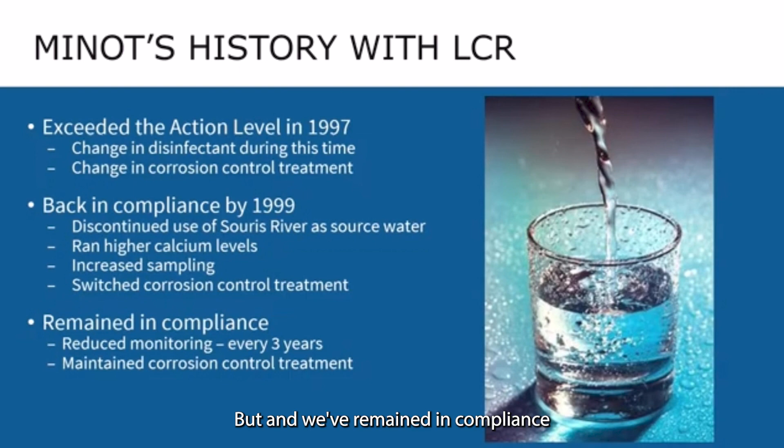And then over the course of those 2 years, we used quite a few different products to varying success. And we landed on one that basically got us in compliance and has held us there. We haven't seen any improvements. Every time we do a sample event, we still have a couple samples that test above the action level, but we haven't seen any improvements in those. So I'll get into that a little bit later. But we've remained in compliance since the late 90s.

So we've been put on reduced monitoring, so we pull samples every 3 years now. And then we've maintained the product that we use. It's a phosphate product. It's called tetrasodium pyrophosphate. It's NSF approved, and it's one of many phosphates that can be used in a drinking water system for corrosion control.

So here's where some of the issues come in. That rule was published in the 90s, so now they're updating the rule. They've started this years ago. We've worked with other communities in the state. We've provided comment to the American Water Works Association, to the League of Cities on some of the issues that we see with the rule.

So they've been contemplating those, but some of the directions that they're heading is basically they want complete and total replacement of all lead service lines in the country within the next 10 years. I think there was about $11.5 billion worth of money in the infrastructure bill that's being used to back up some grants in the state. So it's going to be a pretty big lift at some point.

So one of the first components of that is we need to complete an inventory of all service lines in the city of Minot. There will be some new sampling requirements. They call it the first and fifth liter. So right now, when we do a lead sample in a house, we tell the homeowner to let their water sit overnight for at least 6 hours.

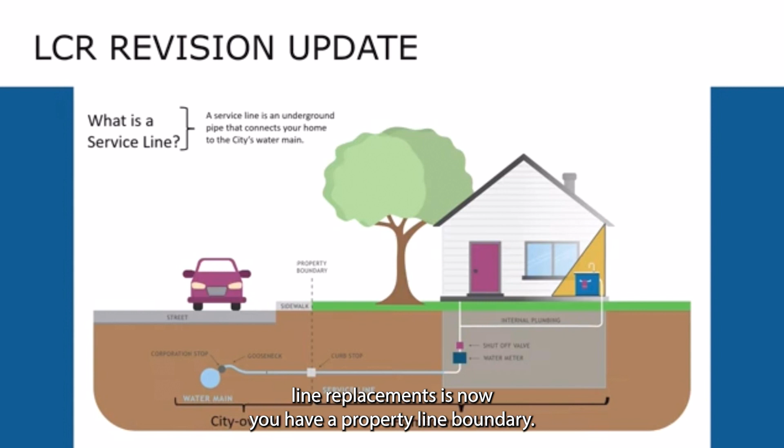The issue that we're going to have when we get into lead service line replacements is now you have a property line boundary. So the city of Minot is going to be responsible for lead and copper testing and replacement of service lines on private property of a private utility. The city does not own the service line into a house from the curb stop into the water meter. So there'll be some things for us to consider there as we go forward.

Lead service lines, if we use state revolving fund dollars through the state, there's a 66% grant funded, but there'll still be the issue of the 34%. If we are mandated to get into somebody's house and replace a service line, generally going down the road of a special assessment, we're probably not going to find a compliant homeowner that is willing to let us in and then sign them up for potentially a $1,000 bill or whatever it is. So we'll have to talk through these.

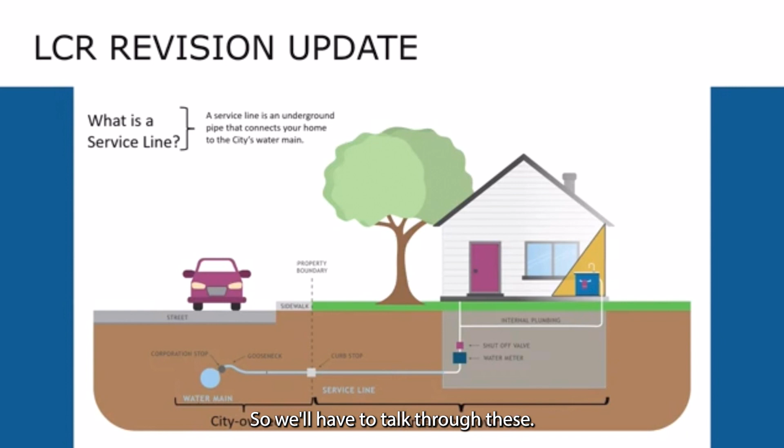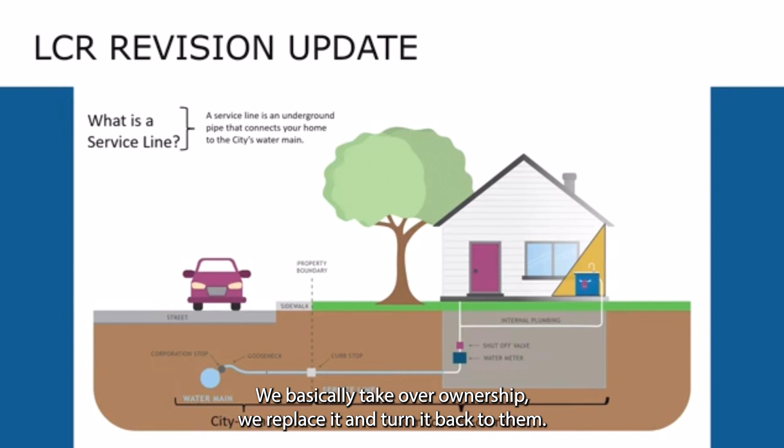My recommendation is probably that we do this just like we do water main replacement projects. And we work with the homeowners. We basically take over ownership, we replace it and turn it back to them. There's a lot of communities that are doing programs similar to that. But these will be things that we'll have to consider as we start getting more into this.

This is a snapshot of a portal that we have where people can log on and they can indicate the material makeup. So red is lead, gray is unknown, blue is copper. So as you can see, lots of gray. We have about 16,000 service lines total. We still have about 8,265 unknowns. So with the EPA, we can submit this inventory. Anything that's an unknown is assumed to be lead.

So where this becomes an issue is if we get into mandatory replacements. Now we're doing 10% of 8,000 instead of 10% of maybe only 1,000 actual lead lines that we have. So the inventory piece over the next couple of years is going to be pretty important for us to keep working through. For some of the identification, we've gone through a lot of public records. We have tie cards for just about every residence in town.

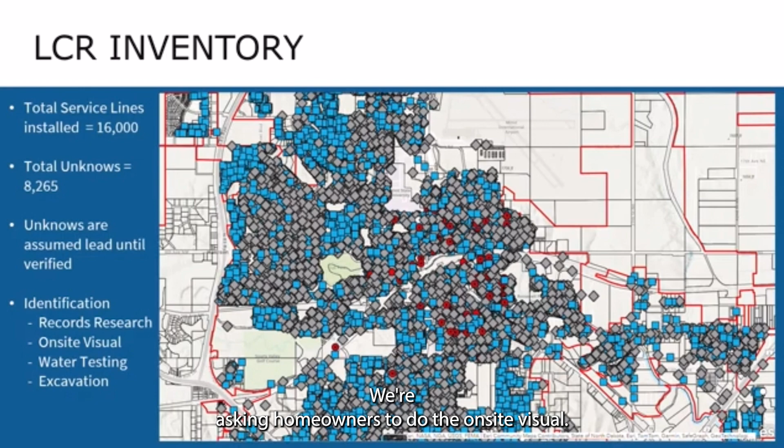We're asking homeowners to do the on-site visual. There can be some water testing where you can look for trace amounts of lead in samples. And then worst case scenario, we have to get into excavation where we have to dig at the curb stop and then look at the two service lines at that point.

These are the different lines that people can come across when they look at them in their house. Lead is item number one. It's pretty noticeable due to the bulged fittings where there's connections made.

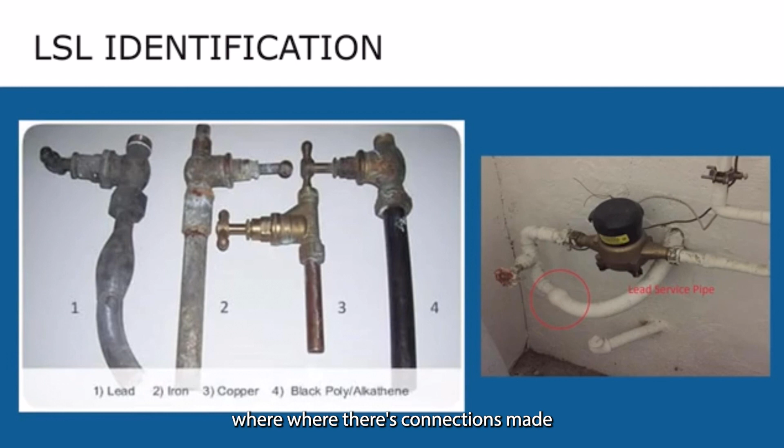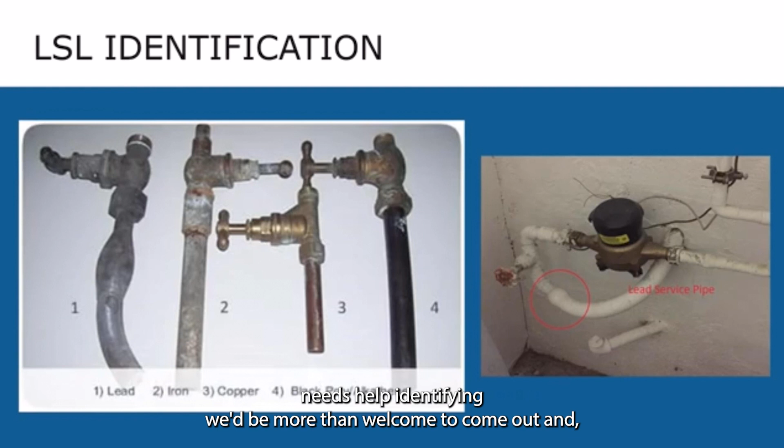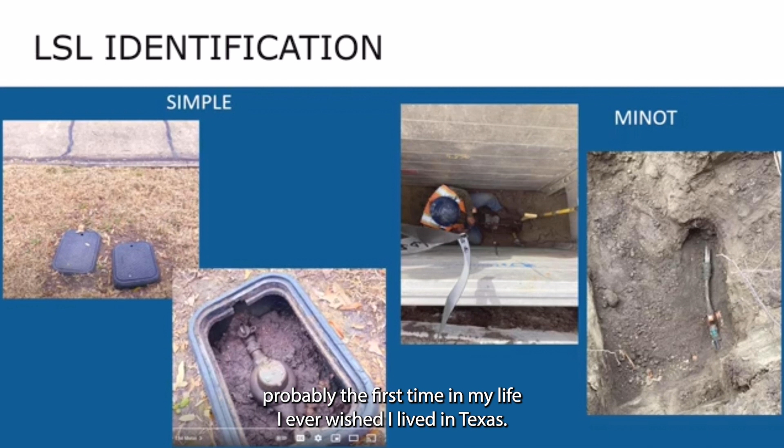Iron, we haven't come across a lot of iron in the system, but copper, and then there is poly. So if anybody needs help identifying, we'd be more than welcome to come out and give them a hand. And just to show the difficulty in the excavation method, probably the first time in my life I ever wished I lived in Texas.

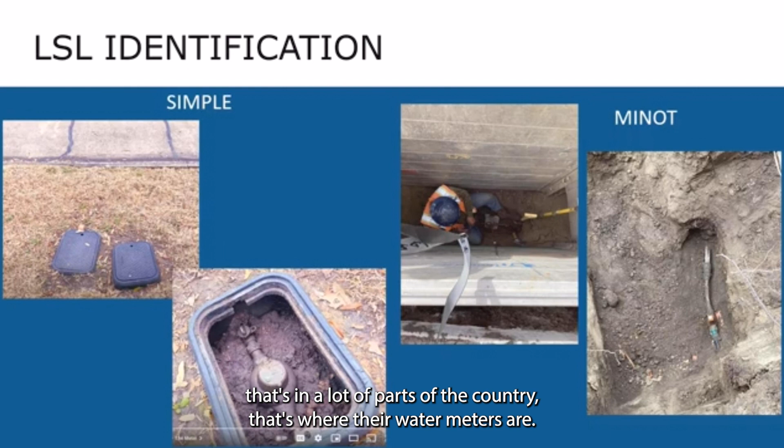So the simple that I show on the left, in a lot of parts of the country, that's where their water meters are. They're right next to the street. They're under a cover about a foot deep. You can look in the hole and you can identify both materials on either side of the water meter. In Minot, we're lucky to get frost depths in excess of 4, 6, 8 feet. So everything is tried to be buried 8.5 feet deep.

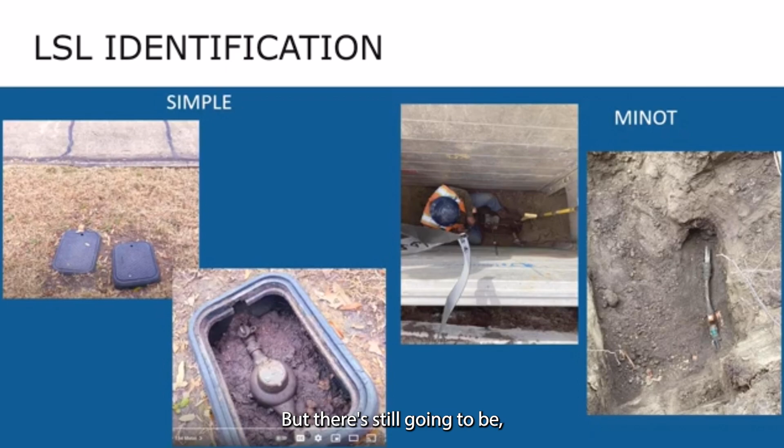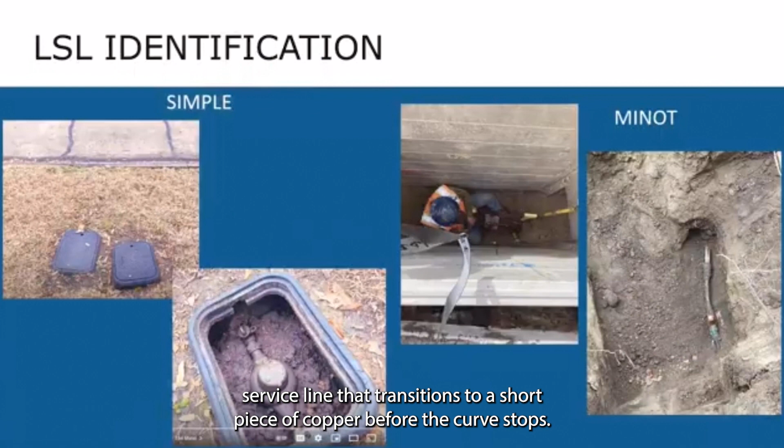So the picture you see on the right, that's a guy down in the bottom of a trench box next to a service line. We can do these identifications without sending a man down there, so we shouldn't have to dig a hole of that magnitude, but they're still going to be 6 to 8.5 feet deep to try to identify these. And then the picture on the far right, that is actually a lead service line that transitions to a short piece of copper before the curb stop. So just to give you an idea of what we're looking at.

So if the rule is delayed until 2027, our first year of compliance sampling would be in 2028. And then our first round of mandatory replacements, if we hit the trigger level, would be in 2029. So we have time, which is a good thing. So we can work through these options of trying to identify some stuff. But it's still a big task in front of us.

So our action plan: continue to research and monitor, and then continue trying to ID all these unknown service lines, whether that's through additional home inspections or if we have to go to excavation. Some of the SRF loans will pay 66% of lead identification projects. So we could hire a contractor to go around town and excavate and identify, and we can get grant funding for that. So that's something I'll be looking into.

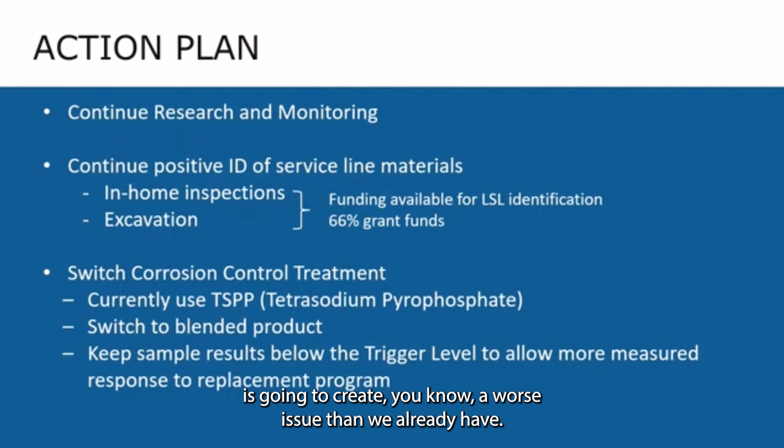And then one of the things that we are going to do at the plant is we're going to switch corrosion control products. I just wanted to be upfront and let the council know. At this point, we don't expect that the product we're switching to is going to create a worse issue than we already have. But there's always a possibility. We're going to go through a lot of changes in the next couple of years in the city of Minot. We're going to go from what we've had as groundwater for the last 100 years probably, and we're going to be transitioning to Lake Sakakawea water in the next year and a half. So different water source, different chemistries, and all these things could have an effect.

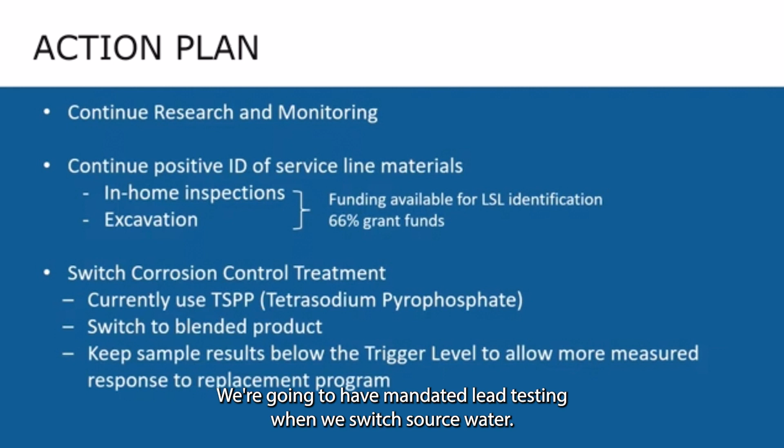But these are all things that, for the state, it's going to trigger a lot of additional testing. We're going to have mandated lead testing when we switch source water. So we'll continue to work through all this and keep watching the product that we're switching to. Our hope is that a different product will maybe lower some of these levels and get us below the trigger level.

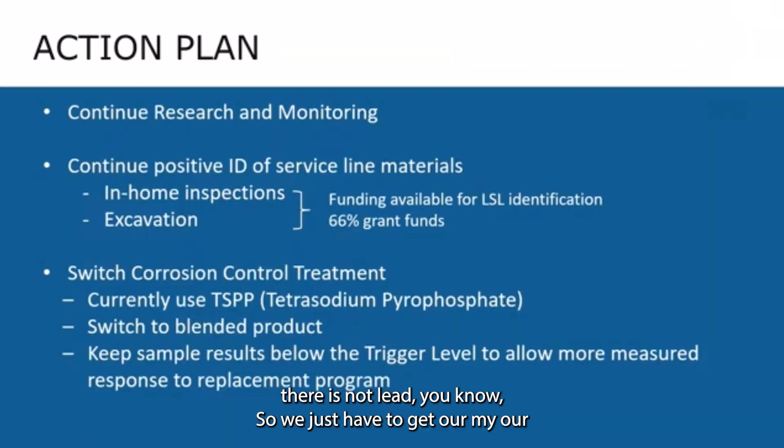If we can get below the trigger level, then we can address the lead service line replacements kind of on our time schedule and according to our 10-year plan, instead of having the mandatory and having to go through all these 8,000 unknowns. And we could be digging where there's not lead, so we just have to get our hands wrapped around that inventory a little bit better to give us an idea of what these replacements will look like.

Right now, I think we currently have about 285 known lead service lines, so a lot less than 8,000. So we need to find what that number is between those two numbers, and it's a pretty wide range.

And with that, I would just stop for questions. Like I said, I just wanted council to be aware of, as we're posting stuff on Facebook, why we're doing it, and we'll continue to do it. And you may see some projects come through to help us do identification. So just wanted you aware. Carrie.

When, I didn't get a sense of when an excavation would be necessary. Like, won't an in-home inspection always lead to identification, or not always, and then you'd have to excavate? Mayor Ross, Alderwoman Evans. So basically, there's two sides to a lead service line, the homeowner side and the city side. So we have to identify both sides.

So if the homeowner identifies their side as being copper, there is a possibility that it's connected to a lead service line that the city put in back in the early 1900s. So we have to identify both sides of the curb stop. That's the issue. So when citizens are telling you what they're seeing inside their home, that could be copper, but there could be lead from the home to the curb stop. It still could be.